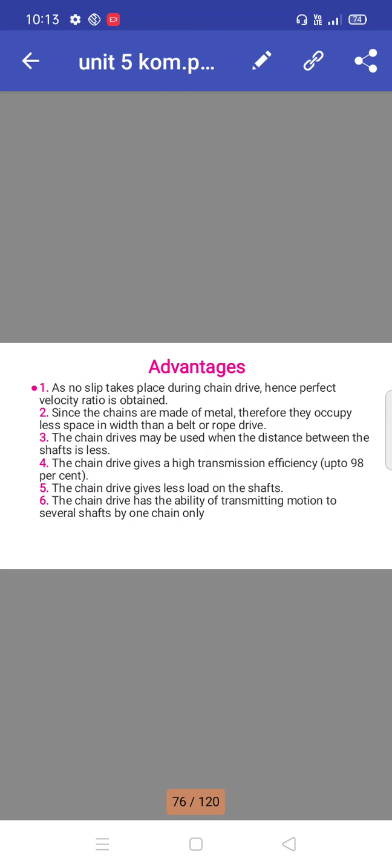The chain drive gives more transmission efficiency, up to 98%. The chain drive gives less load on the shaft. The chain drive has the ability to transmit motion to several shafts by one chain only.

Disadvantages: the production cost of chain is relatively high. The chain drive needs accurate mounting and careful maintenance. The chain drive has velocity fluctuation, especially when unduly stretched.

Pitch of the chain: it is the distance between the hinge center of the link and the corresponding hinge center of the adjacent link, as shown. Pitch circle diameter of the chain sprocket: it is the diameter of the circle on which the hinge centers of the chain lie.

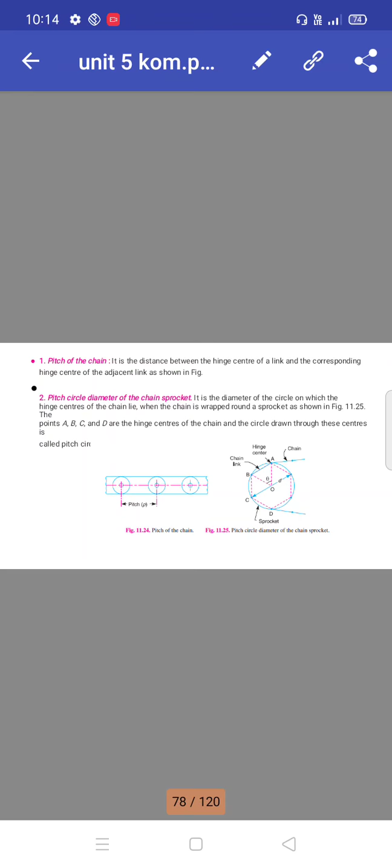When the chain is wrapped around the sprocket as shown, the points A, B, C, D are the hinge centers of the chain, and the circle drawn through these centers is called the pitch circle. Relation between pitch and pitch circle diameter: D is the diameter of the pitch circle and T is the number of teeth on the sprocket. So D is equal to P cosecant (180 degrees by T).

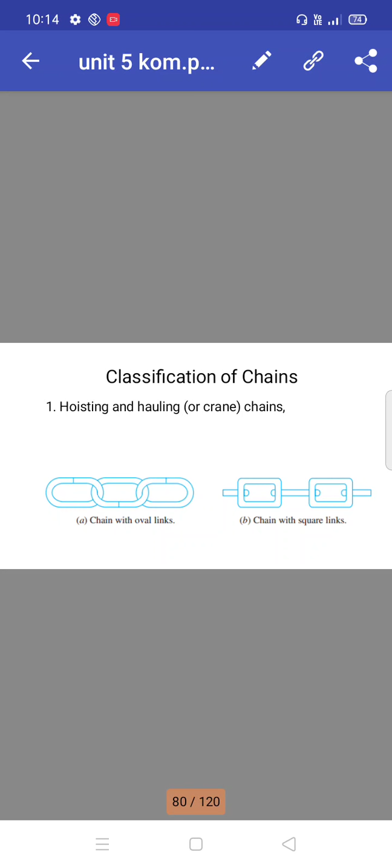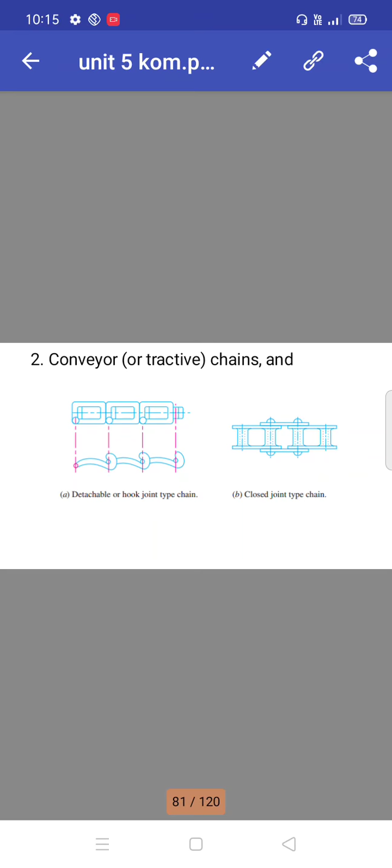Classification of chains: hoisting and hauling or crane chains, conveyor or tractive chains, detachable or hook joint type chain, then closed joint type chain, then power transmitting or driving chain.

Friction clutches. A friction clutch has its principal application in the transmission of power of shafts and machines which must be started and stopped frequently. The contact surfaces should develop a frictional force that may pick up and hold the load with reasonably low pressure

between the contact surfaces. The heat of friction should be rapidly dissipated and the tendency to grab should be at a minimum. The surface should be backed by material stiff enough to ensure a reasonably uniform distribution of pressure.

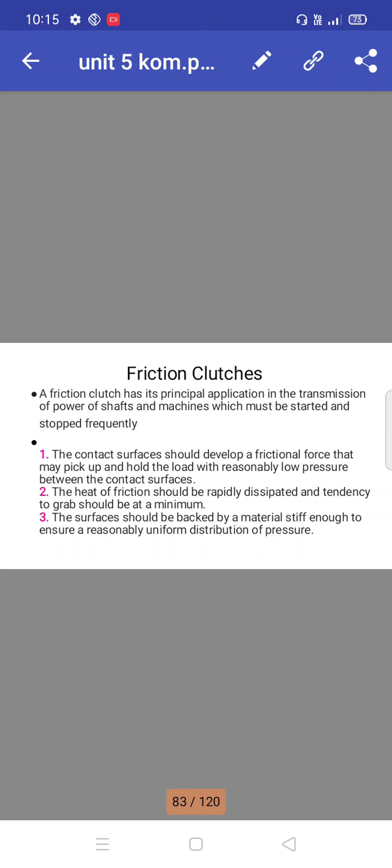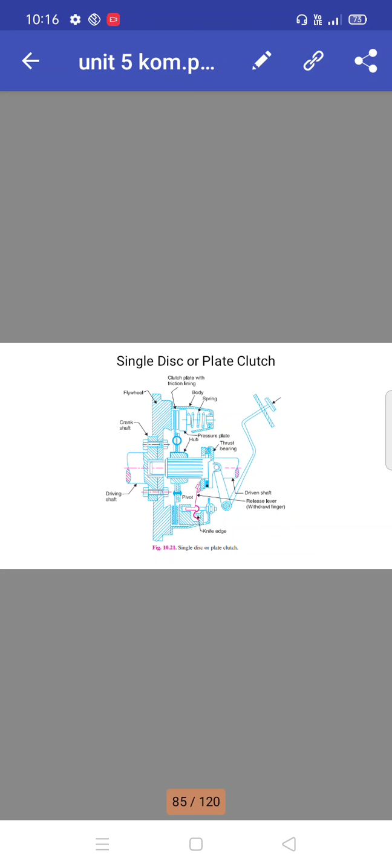Types: the friction clutches of the following types are important from the subject point of view: disc or plate clutch, single disc or multi disc clutch, cone clutch, and centrifugal clutch. This is a schematic diagram of a single disc or plate clutch.

T is the torque transmitted by the clutch, P is the intensity of axial pressure with which the contact surfaces are held together, R1 and R2 are the external and internal radii of the friction faces, and mu is the coefficient of friction. Consider an elementary ring of radius r and thickness dr as shown. We know that the area of contact surface of the friction face is equal to 2 pi r dr.

Normal or axial force on the ring: del W is equal to pressure into area, equal to P into 2 pi r dr. And the frictional force on the ring acting tangentially at radius r: F suffix r is equal to mu into del W, equal to mu into P into 2 pi r dr. Frictional torque acting on the ring:

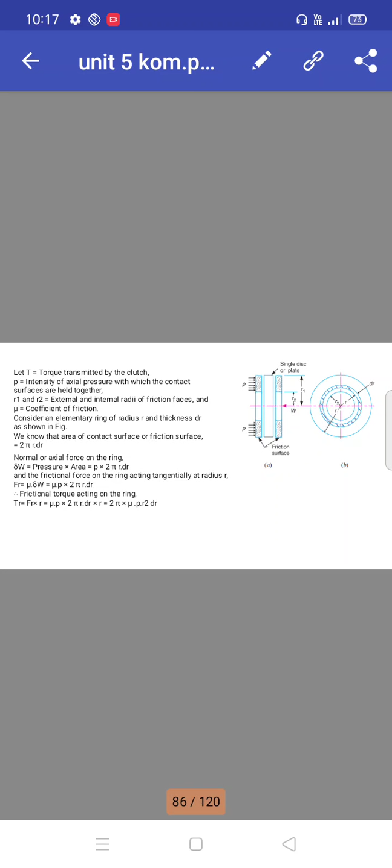T is equal to Fr into r, so mu P into 2 pi r dr into r, so 2 pi mu P r squared dr. Considering uniform pressure,

Friction in journal bearing, or friction circle. A journal bearing forms a turning pair. The fixed outer element of the turning pair is called bearing, and that portion of the inner element, that is shaft, which fits into the bearing, is called journal. Journal is slightly less in diameter than the bearing in order to permit movement of journal in bearing.

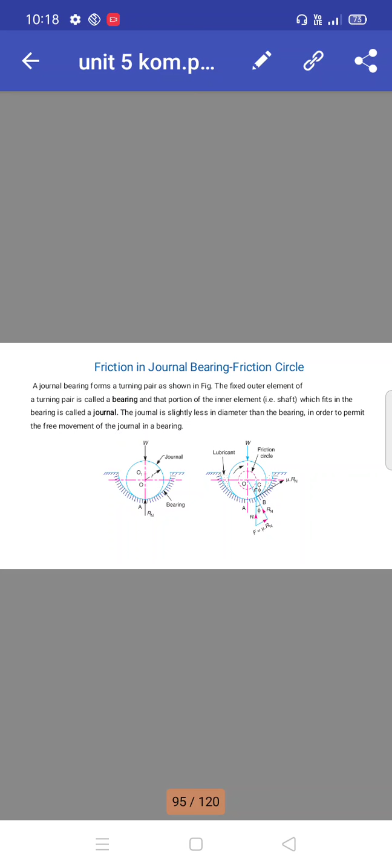When the bearing is not lubricated or the journal is stationary, then there is a line contact between the two elements as shown. The load W on the journal and normal reaction, that is Rn equal to W of the bearing, acts through the center. The reaction Rn acts vertically upward at the point A. This point is known as seat or point of pressure.

Now consider a shaft rotating inside the bearing in clockwise direction as shown. The lubricant between journal and the bearing forms a thin layer which gives rise to a greasy friction. Therefore, the reaction now does not act vertically upward but acts at another point of pressure B.

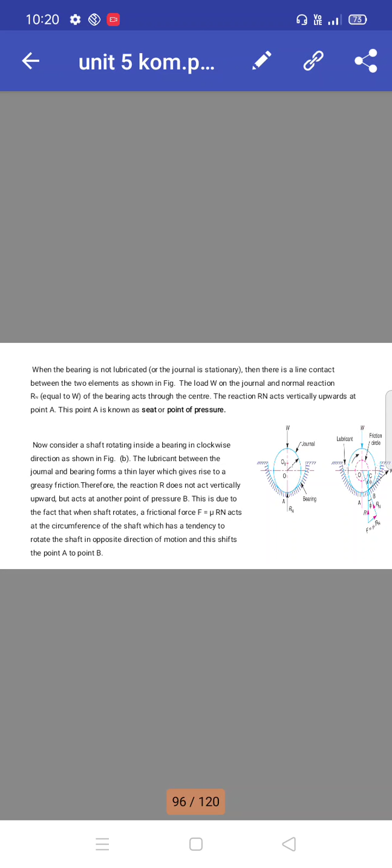This is due to the fact that when the shaft rotates, a frictional force F equal to mu Rn acts at the circumference of the shaft, which has a tendency to rotate the shaft in opposite direction of motion. This shifts the point from A to B. In order that rotation may be maintained, there must be a couple rotating the shaft. Phi is the angle of R, the resultant of F and Rn.

Mu is the coefficient of friction between the journal and bearing, T the frictional torque in newton meters, r the radius of shaft in meters. For uniform motion, the resultant force acting on the shaft must be 0 and the resultant turning moment on the shaft must be 0. In other words, R is equal to W, T is equal to W into OC, so W into OB into sin phi.

Since phi is very small, therefore substituting sin phi equal to tan phi, T is equal to W r tan phi, equal to mu W r, since mu is equal to tan phi. If the shaft rotates with angular velocity omega radians per second, the power wasted in friction is P equal to T into omega, equal to T into 2 pi N by 60 watts, where N is the speed of the shaft in RPM.

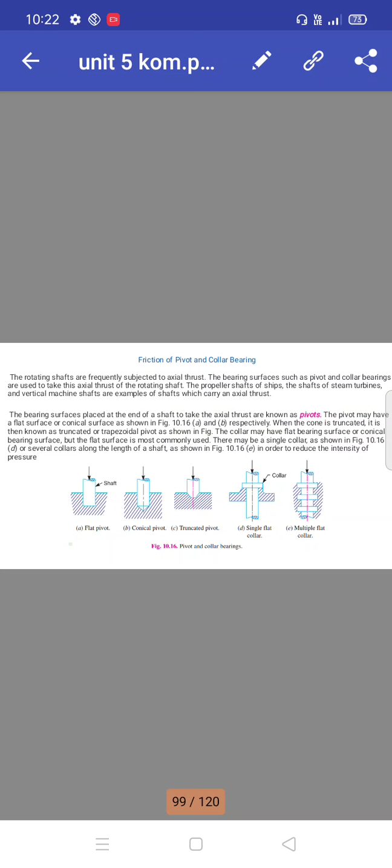Friction of pivot and collar bearing. The rotating shafts are frequently subjected to thrust. The bearing surfaces such as pivot and collar bearings are used to take this axial thrust of the rotating shaft. The propeller shaft of ship, the shafts of steam turbine and vertical machine shafts are examples of shafts which carry axial thrust.